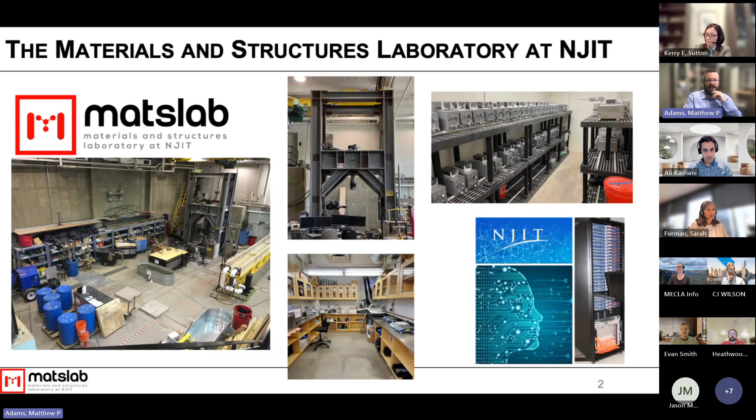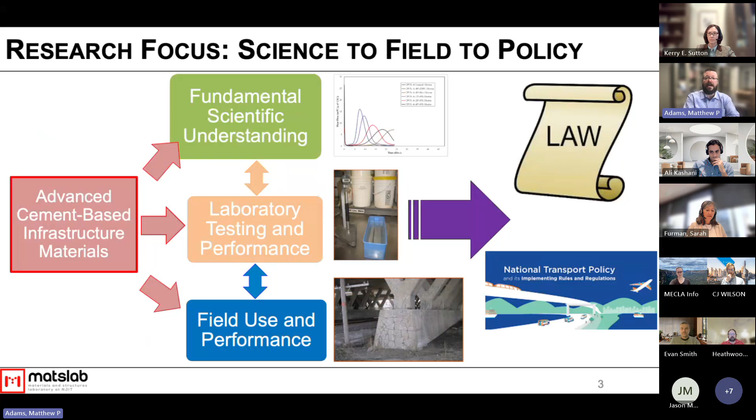Our lab focuses on concrete materials, cement-based materials, long-term durability, and sustainability issues associated with that. I also do a lot of work looking at how we can connect fundamental science to field use to policy and legislation. That connection is one of the reasons why I ended up being asked by ACI to chair the low carbon code committee and help push this through, because I was very familiar with the range of policies that have been put in place in the US, which was sort of the impetus for us to develop this. There were all of these policies being developed sort of scattershot across the country and really around the world, so we wanted to try to provide some better guidance.

So since you're a sustainability working group, I'm not going to go over all of the embodied carbon emissions things, I assume most of you are familiar with that. But I do want to take a second to just define low carbon concrete in a more generic way. Low carbon concrete is a performance requirement that's going to be set by your design professional, and right now it's mostly based on reducing the global warming potential of the concrete below a particular threshold.

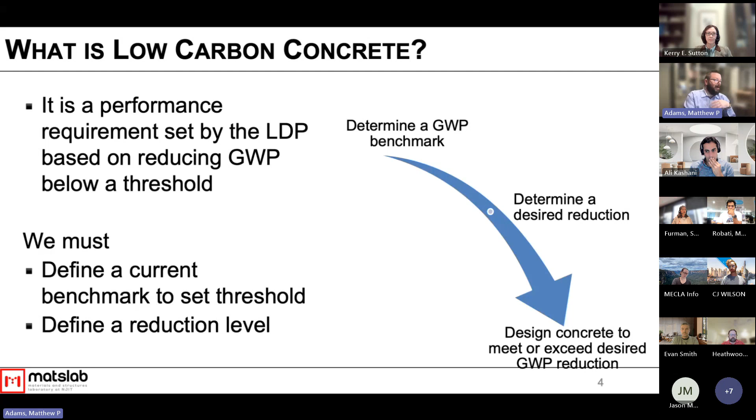So in order to define what low carbon concrete is, first you need to set a benchmark. You need to know where you are in terms of GWP right now. You need to determine your desired reduction or limit, and then you have to design to meet that desired reduction. We see in the US there are a number of benchmarks that have been developed.

The most commonly used one right now was developed by the National Ready Mix Concrete Association, which is a trade organization of ready mix concrete facilities. They used data from their members to essentially create benchmarks for different regions of the US. This is now a couple of years old, but this is what we ended up using as a standard in the code, but we'll talk about that later.

But even within this, the data is too broad, it's not focused enough on certain areas. It's something like 65% of the data used by them came out of either New York City or LA, so that's not really necessarily representative of the entire country, and some of the north central areas had very few data points, like in the middle of the country where there isn't nearly as much construction. So benchmarks are actually really difficult to set.

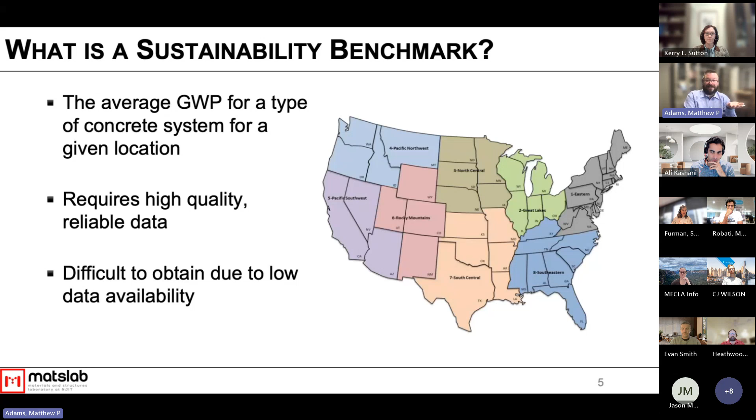I'm sure I was reading your guide that you put out, I'm sure you're aware of that. How do we get to low carbon concrete? It's a design goal, it's a performance requirement. A lot of times I get asked, I'm sure you get asked, what is the concrete mixture I should use? But it's not a single mixture, it's a design goal, and there's lots of different ways to meet that. It's really going to be subject to what you have available locally, cost requirements, and what your engineers and contractors and labor can actually work with and what they know how to work with.

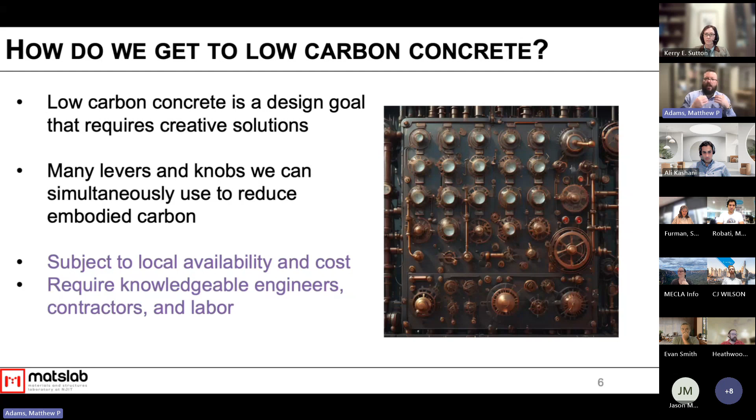For that reason, our code does not focus on telling you how to make concrete. The code does not say you can or can't use certain materials. The code is really set on helping you develop that GWP limit and figuring out what that number should be that you can then specify for design.

So when we talk about getting to low carbon concrete, we have all of these solutions out there technologically, but we're not necessarily using them. Of course, there's new ones being developed all the time, but we still have access to a number of things, and we're still not doing it. Why is that? First, of course, there's a fear of cost, that these new materials, new ideas are going to cost more. Some of them do. A lot of them, if they get to market at a scale that we actually need for concrete, are typically reasonably priced.

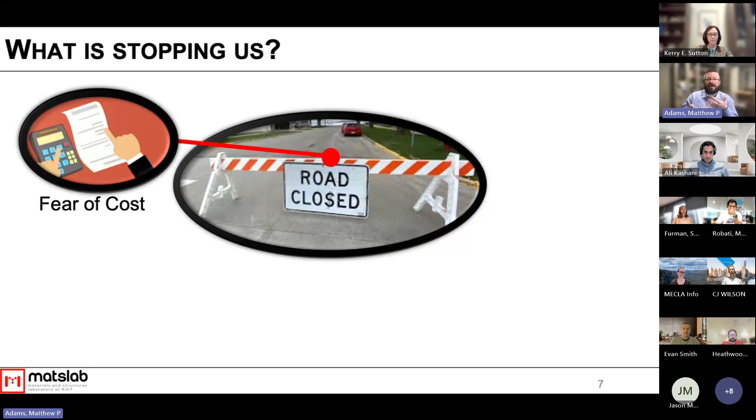Where the cost really comes in is that knowledge transfer time period where we screw up in the field and we have to take things out, or we're spending a lot of time as designers in the office reading that we can't bill to clients, et cetera. So all of that training costs a lot up front.

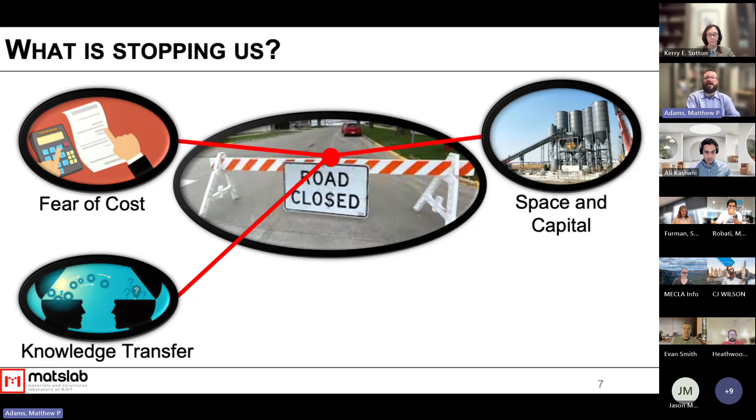For concrete manufacturers, there's space and capital issues, trying to work with multiple materials now, and where do you store them and how do you mix them properly? Here in the US, we use very few pre-blended systems. All of the ready-mix contractors like to blend themselves at their plants, so then they need to have silos of all those materials.

Moving to anything new obviously gives us a lot of risk and liability concerns, particularly when you don't have code provisions to fall back on and other things that you can say, look, I'm following what the standards are requiring me to follow. But of course, all of this can be handled with political will, like getting the right policies in place.

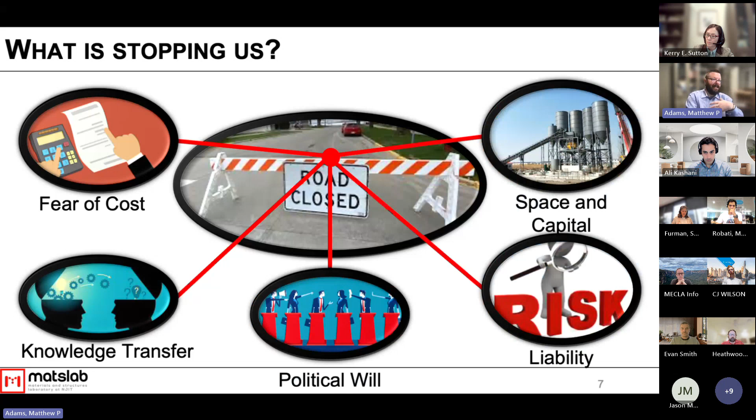And so that is sort of the impetus for a lot of the policies that have been developed in the US, and then ultimately the code, because when we have a code that we can point to as a requirement, it makes it a lot easier to overcome these other items because now they're being forced to do this.

But when we look at policies around the world, in terms of legislation or just agency policy or actual code policies, there's lots of differences in the way people are working with low carbon concrete. The way they're setting benchmarks is really different. What they are setting for limits is really different. How do you calculate whether there's incentives or no incentives? There's really a big difference there.

And here in the US, it's done on a state by state and even city by city level, which can be really confusing for the LDPs that are typically working in multiple states at the same time. And so that's difficult.

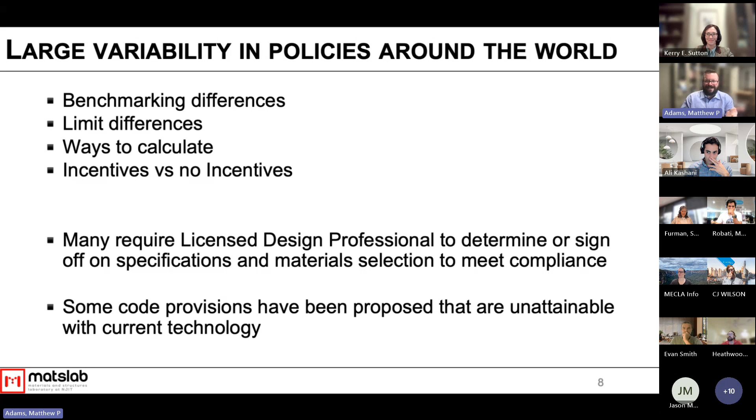And then a lot of the code provisions or that have been put into policy have been proposed by environmentalist groups that don't really understand where we are technologically with concrete. And they are actually trying to get provisions into policy and legislation that are unattainable with current technology and not really something that is possible. And when you do that, of course, policies get ignored and nothing happens. So it's really important to kind of balance where we need to go with what's possible.

So all of this got us to putting together this code, which I was honored to be asked to chair this committee. This is our group of folks that put this together. It was a very dedicated group of 15 or so people, and we were able to write this and get this published and approved in about 18 months. So it was very quick, but it's a very small document. If you actually get the document, it's only about 24, 25 pages.

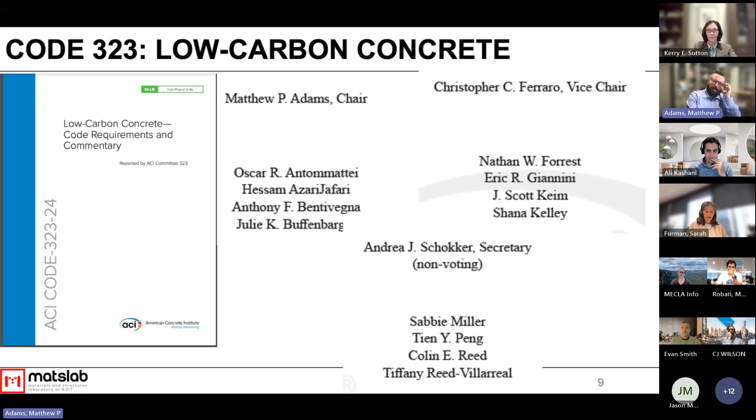It's been out for a year now. It's really, in terms of code language, it's the first of its kind in the world. There's plenty of policies and guides that have been written, but in terms of actual mandatory language, this is the first one. And what we're really doing is providing the designers with a method of setting your global warming performance requirements.

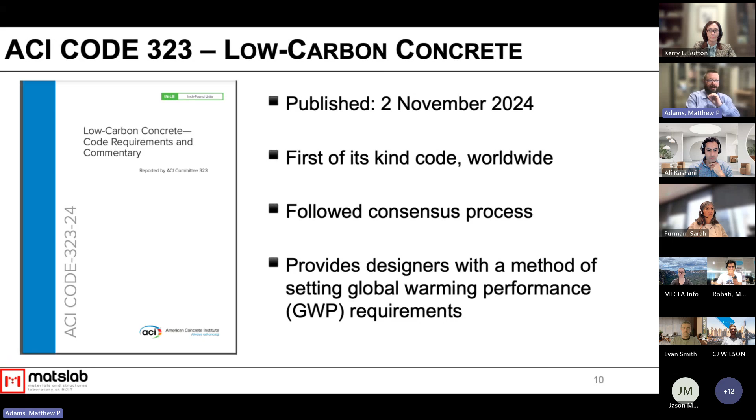So what is that number that should be met? The way that we do this is different than what we're seeing in a lot of policies that are being put forward. Many policies that we see are focused on carbon limits per each class of material or each type of mixture, right? So your 30 MPa mix needs to be, all of them need to be below a certain GWP threshold. The difficulty with that is it restricts some flexibility in the overall design.

It also can lead to increased volumes of concrete because people will lower the GWP, maybe get a lower strength in there, and then increase the total volume of concrete that they're using to meet structural requirements. So because of that, we wanted to look at a whole carbon budget for a whole building, but of course that's really difficult when you have a scope of only one material.

And within ACI, we're concrete, right? We can't set code limits for doing a whole building or whole project lifecycle analysis because that necessarily involves other materials. So what we decided to do was this weighted carbon budget.

So basically where we're using carbon limits as somewhat of a benchmark, but we weight all of that by the volume, and you're actually allowed to use some mixes that would be over your limit and some that would be under. And as long as you're balancing and your total weighted average is below that GWP limit, then you meet the requirements. And this is a way that we were able to cover more materials.

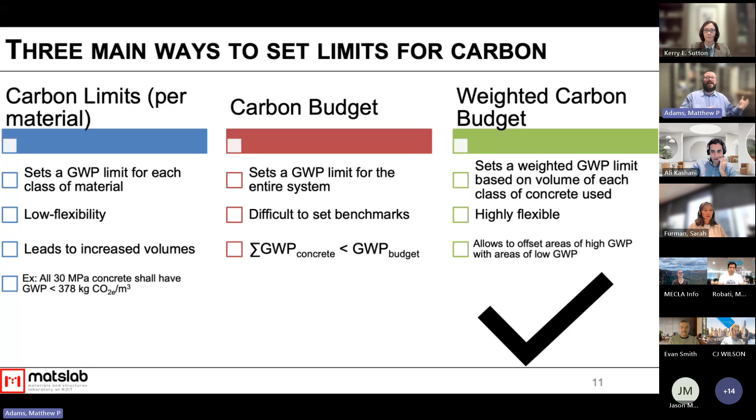And then the designers just say, well, everything needs to be high early strength, right? So we're trying to avoid some of those loopholes.

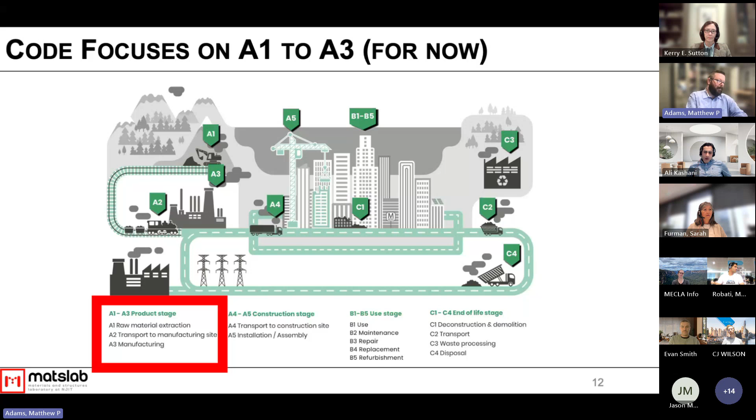Our code is also only focused right now on A1 to A3 stages, so raw material extraction up until the concrete leaves the ready mix facility. Again, this is because this is where we have data, this is where EPDs are available. We don't really have standardized tools for the rest of the life cycle at the moment. We would like to get there with concrete. I think you all probably know that, right? Concrete shines as a durable material. But in terms of having the right tools to do it, we're just not there yet.

Our framework, when we were putting this together, we were starting on a blank page, so we were trying to figure out how to do this. So what categories do we need to use, what methodologies, what were our requirements, and then most importantly, our exceptions.

So this is the outline of the code. What I really want to point out here is that the meat of the code is in chapter 4. This is where all of our calculations are. The first 3 chapters are really about scope, how you can use it, and just some references. The last 4 chapters are essentially copies of each other that have some specific limits for different types of projects. This is basically set up because in the future, as we expand on this code, we expect to see differences in the way certain things need to be handled for certain types of projects. But this first version of the code, essentially, it's the same thing for all of the project types.

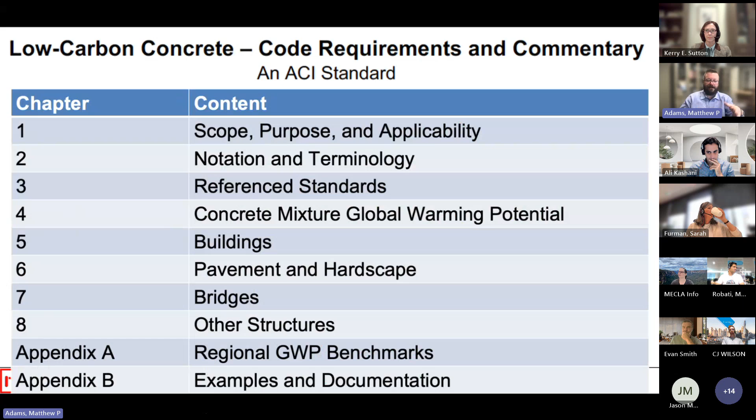And then we have an Appendix B, which is examples and documentation. For you guys in Australia, Appendix A you'll just ignore, because those are the regional benchmarks that were available for the US. We published those in there, but we'll talk about that in a second.

In terms of scope and adoption, this code can really be adopted in many, many ways. It can be adopted as just a code book. It can be referenced by a designer as something that wants to be followed, or an owner can require you to follow it. So this is pretty standard language in codes in terms of how they can actually be used.

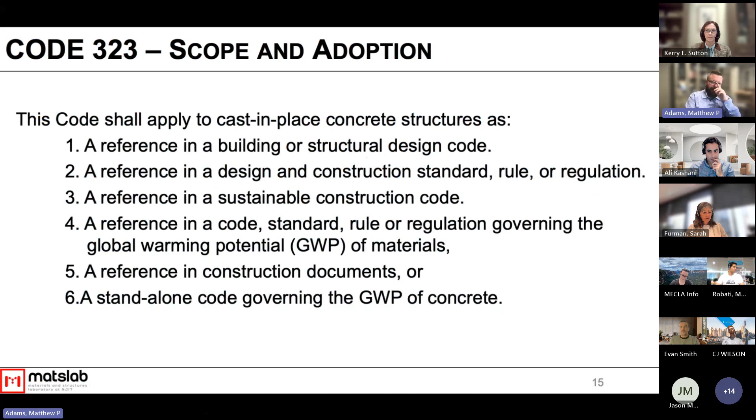What do we apply to? We really apply to everything that involves concrete construction, including repair and rehabilitation. What you'll see though is that what triggers needing to use set limits is the amount of concrete that you're using, so you're only thinking about the new ready mix concrete being applied. And so typically, unless you have a huge repair job where you're using a lot of ready mix for repair, you're not going to really trigger this code in repair and rehabilitation at the moment. For the most part, you're only going to trigger this in new construction.

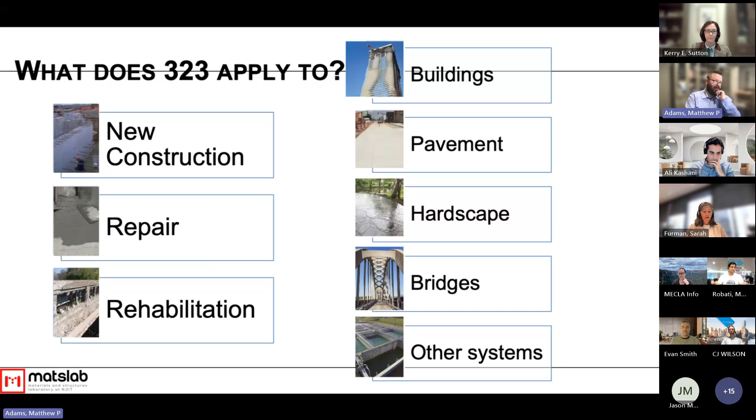So let's talk a little bit about exceptions. Right now we don't cover precast, we don't cover tremie, auger cast, and shotcrete systems. And then we also don't cover pavers and masonry units. Pavers and masonry units are really outside of the scope of ACI unless there's an agreement with the Masonry Society — they own the code work for the prefab block systems. Precast and these other materials, we just don't have the right data to be setting benchmarks yet for them, and they are significantly different in terms of their requirements for mix design that we didn't feel comfortable lumping them in with everything else.

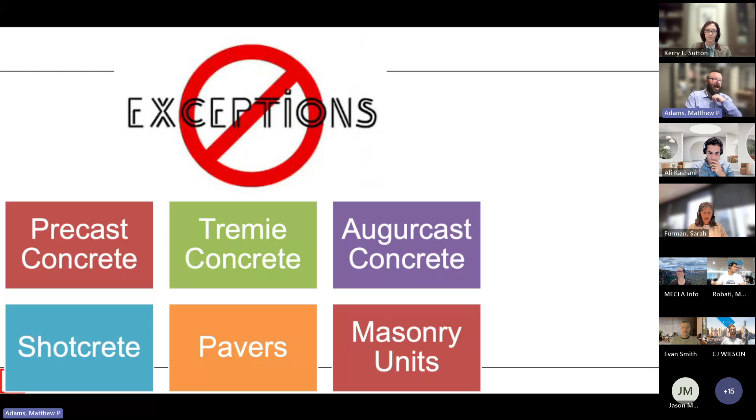The code is also limited to a mid-range normal strength range of concrete at the moment. Again, same problem — we just don't have the data in general around the world to be setting benchmarks for concrete outside of this range. That's not to say that if you were to adopt it yourselves and you had the data, you couldn't remove this exception and just have the benchmarks that you want. So Kerry will talk a little bit about the ways that you could try to use the code and change it how you want.

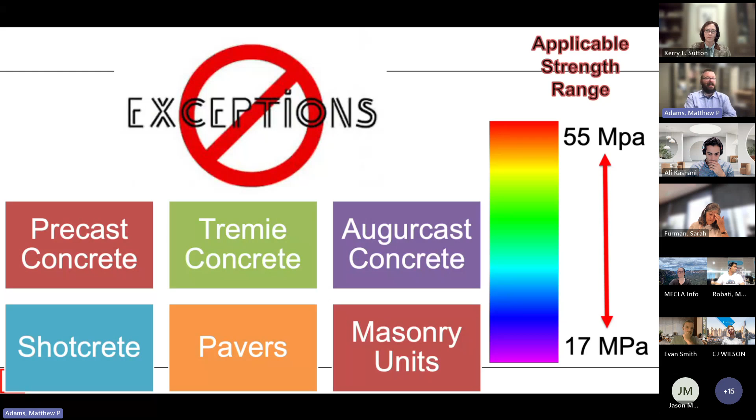In terms of benchmarking, what should you use? Benchmark, you've developed this in your document — I went and looked at it. This value for us is going to be a moving target over time. It's likely going to, hopefully, reduce over time. But the key point here is that a benchmark is not a minimum standard, it's just what we want to compare ourselves to. And we always want to be consistently trying to reduce carbon over time.

What the code states is for benchmarking, you should really use your own benchmarks, use local data, develop your own benchmarks, and set limits that make sense for you based on locally available materials. So I went and looked at your guide to low carbon concrete, which followed a similar tool that GCCA put out in the UK. You could use these as your benchmarks, choosing one of these lines as the benchmark you want to set, and then set a limit based off of that. So you already have that there.

I would recommend, and you can correct me if I'm wrong, but this appears to be for the entire country. You may want to start thinking about looking at it on a more regional basis, because like us, you likely have regional variations in what materials are available and what standard practices are. We really spent a lot of time looking at that, because we wanted to make sure we weren't overtaxing companies that are still trying to figure this out in parts of the US, just because somewhere like New York City is way ahead of the curve. Oh, I see, that's guide version 2. Great.

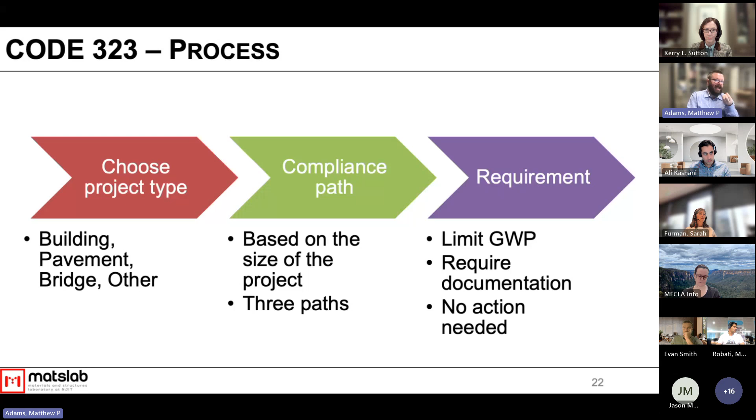The process for us is you're going to choose your project type, and then there's a compliance path based off of the size of the project, and then you try to meet your requirement. The main documentation is that calculation: getting your GWP project average, your benchmark average, and then determining what your reduction is. You also have to provide the EPDs to go with it. In the code, we also allow you to not use an EPD and just use an LCA.

This is, again, because there are parts of the country where concrete plants don't have any EPDs yet, and it takes time to develop those. So we're letting people use a more preliminary tool. Likely over time, hopefully that will go away and it'll just be EPDs, but we're trying to be cognizant of all that. So that's a basic overview of the code and what we're trying to do.

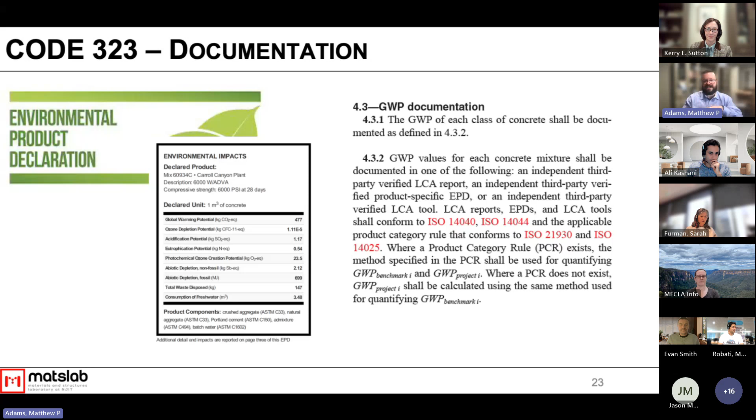If you look my name up on YouTube, I've given similar versions of this presentation several times, and there's one or two out there with examples, but we didn't have time to get into those today. There's a couple presentations out on YouTube on 323 that dive deeper into it. But now I want to have Kerry go into that stuff.

Kerry, do you want to take over? Do you have the slides there? I do have them right here, but it might be easier for you to take over. Okay, I couldn't combine them. Did I just grab them? So I have it on my screen, can you guys see? I'll put it in, it's not full presentation mode. There you go. Okay, I can't see.

Just to introduce myself here real quick, Kerry Sutton. I'm with the American Concrete Institute. I am a code advocacy engineer, but I also wear another hat there. I've just recently become their executive director for their Center of Excellence for Carbon Neutral Concrete. This is kind of a new position for me, although I've been supporting this Center of Excellence.

If you're interested, take a look at our website. This center also supports a lot of work that Matt does and the committee has done within the ACI organization. So I'm just going to move through here on the presentation. Just a little background on ACI I wanted to give you, to kind of dovetail with the good work that Matt and the 323 committee has done.

As he mentioned, this is the first code we know of that specifically addresses low carbon concrete. So we're pretty proud and happy with the work Matt and his team has done. ACI is a large organization - I don't know how much you all know about ACI, but we have over 10,000 members worldwide, hundreds of committees, and over 30 codes, specifications, certifications, a lot of things.

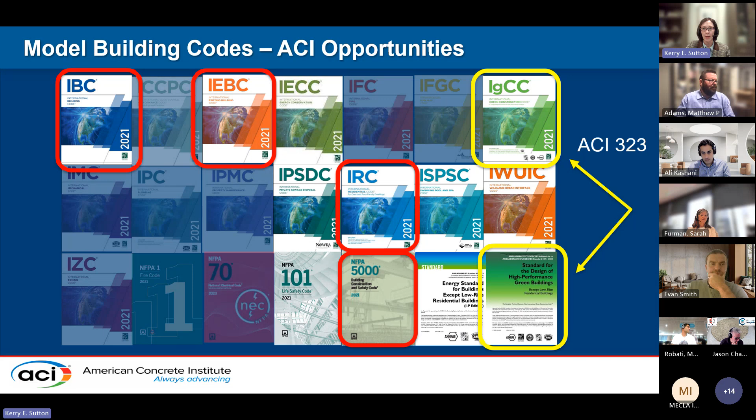The I codes in the U.S., once they get referenced in a model code, you have the states and other jurisdictions who will then adopt those model codes. The states here in the U.S. are a little bit behind, so sometimes a model code will be out already. Right now the ICC has the 2024 model codes, and many of the states are a few years behind, just starting to adopt the 2021 codes. So we're always kind of in this cycle of reaching out to the different jurisdictions.

But that does not mean education does not start. We're already reaching out to different state authorities, letting them know of this code, that it's out there, and that we're hoping to have it referenced in our model International Green Construction Code. Matt alluded to this, the general building codes.

We also look at the state level, but what we see, and I believe this could be true in other countries as well, is that a lot of the green codes like our ACI 323, a lot of the interest in these sustainability issues, a lot of times rises from the grassroots. We see many states as well as cities, major cities, townships, local municipalities, really moving to look at adopting these type of codes or standards to help address their goals of sustainability.

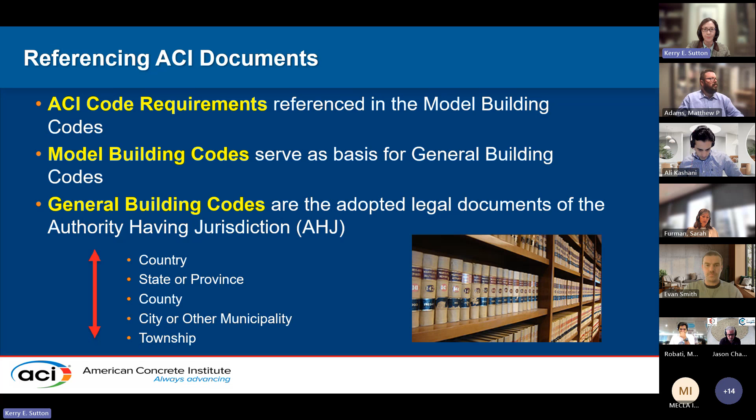So how we do this, we look at partnerships. Partnerships are key to getting any type of code like this adopted, referenced, and used within model codes or specifications. ACI has put together a program where we put together what we call collaboration groups.

Matt's done a little bit of work on this. He's done some education internationally with other groups other than in Australia. I think, Matt, you've been to Japan, the Middle East, and some other locations, where we're hoping to partner to have folks look at ACI 323 for adoption in their building codes. So this is in place.

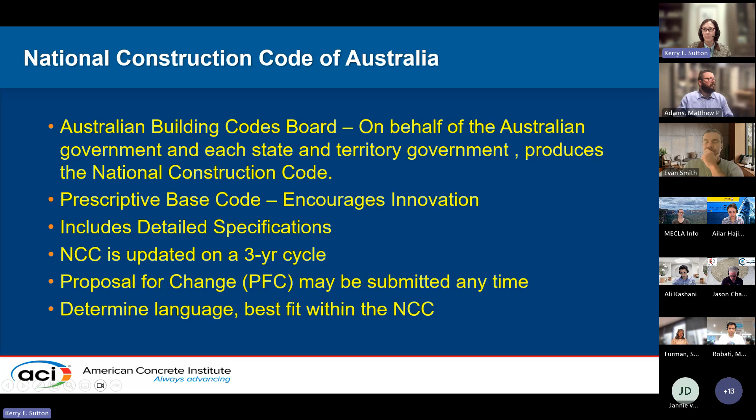So the key is determining where within your national building code language to address a low carbon concrete code such as ACI 323 would fit best for everybody, for the code folks, for the industry, and for the design professionals. That's a collaboration that has to start early on if you want to look at adopting a code such as ACI 323. So that's all I had. I wanted to lay some of the framework out there and hopefully generate some questions within the group. So I'm going to come out of this. Thank you.